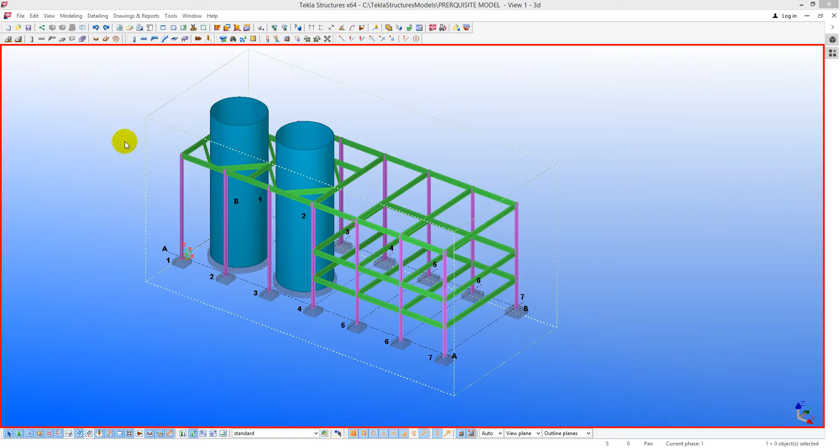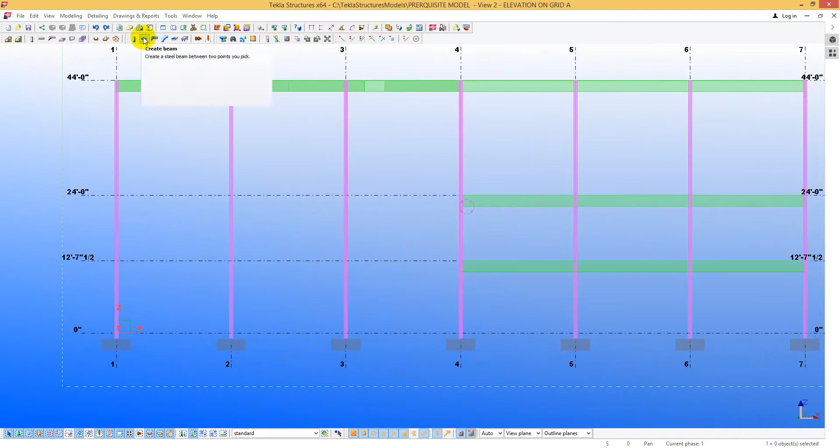In this video, I'm going to show you how to create the HSS bracing along grid line A. Well, to begin with, we need to have a view of grid line A opened, and so we will open this view here, and then we'll go and grab our beam tool, double click on that, and load the presets for HSS brace.

Okay, it is giving you a 4x4 by quarter-inch HSS. Of course, that can be changed by going into the profile catalog here and selecting an alternate size. You should also know the material grade when you're doing a real project. So let's just continue. We will hit apply, and then we can close the dialog box and begin creating.

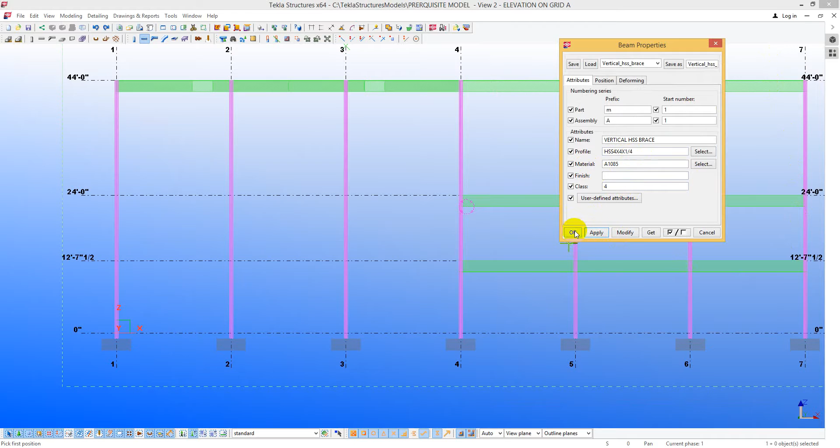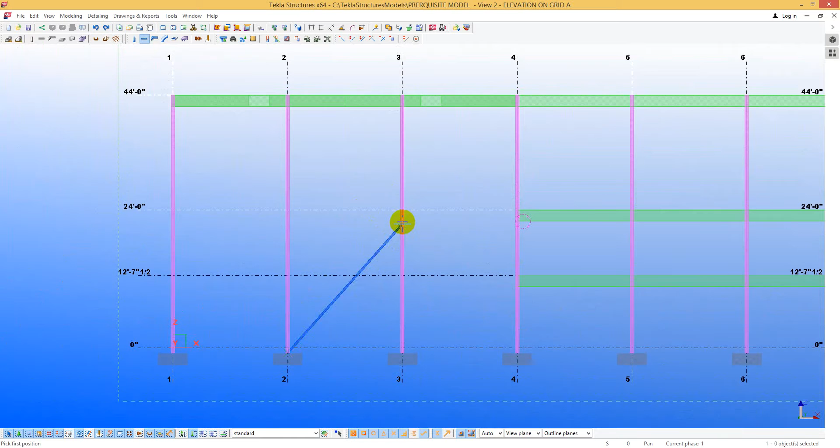Notice the plus sign on our cursor. We're going to go down and grab the bottom of this column right there, and we want to snap to the center point of this column right there. And then we want to click at the center point of the column again, which would be at the end of this piece here, and we would go to the top and click.

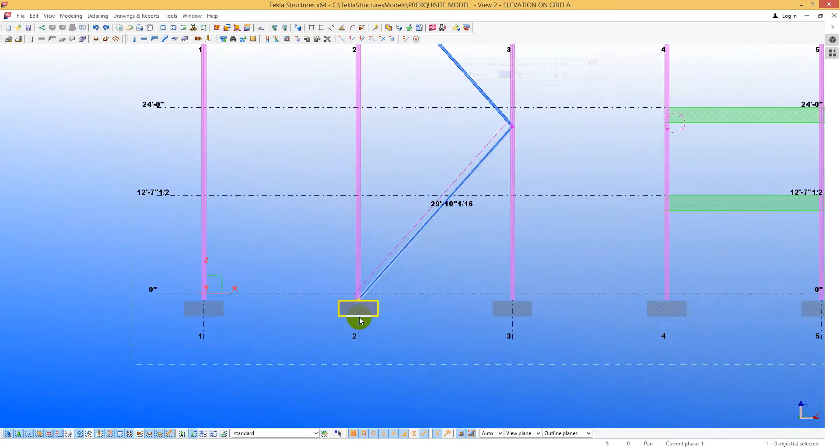Okay, the next step in the exercise is to lower the start points and end points, or raise them accordingly. You can click on the end point, and do not click on the whole member and raise it, because we will raise the entire member. We only want to raise the work point. So I'm going to click on that, and that becomes solid.

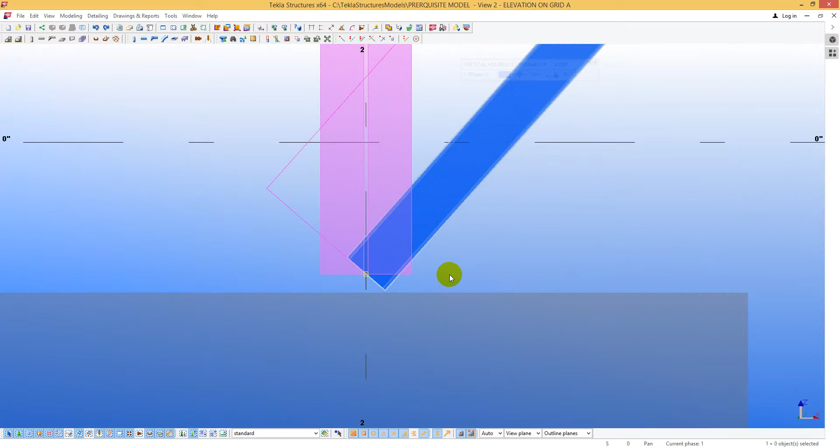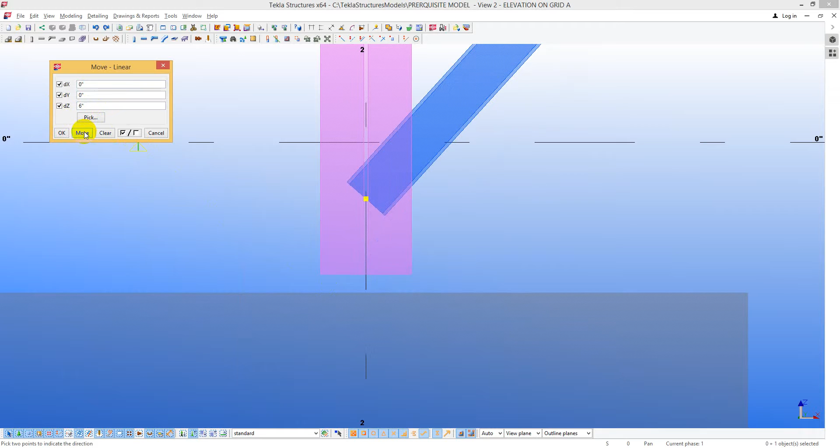Another way to make that solid, which is a good thing to know, is to hold your Alt key down, press Alt, and draw a box around, and release the mouse and the Alt key. Either way gets the handle isolated. We're going to right click, move special linear. We're going to move it 6 inches in the vertical, so type 6 inches in here and hit move, and you'll see it move. Right click interrupt.

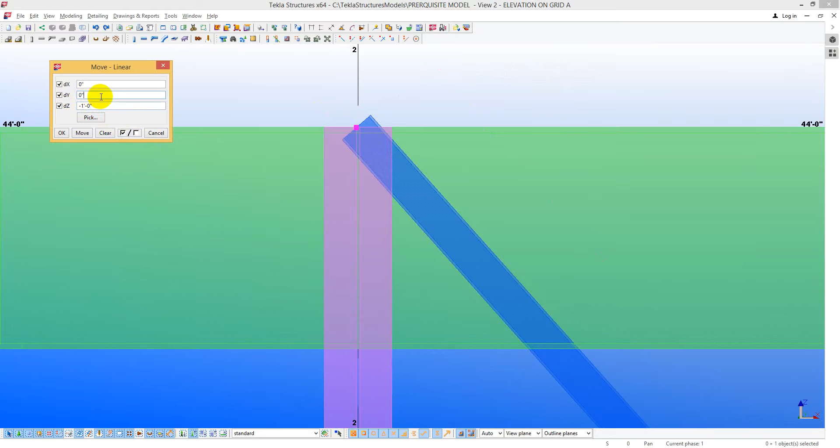And now we'll zoom out and go to the top and click on the member, press the Alt key, draw a box, and in this case we're going to drop it down minus 12 inches, which is a foot, and move. And there we have it.

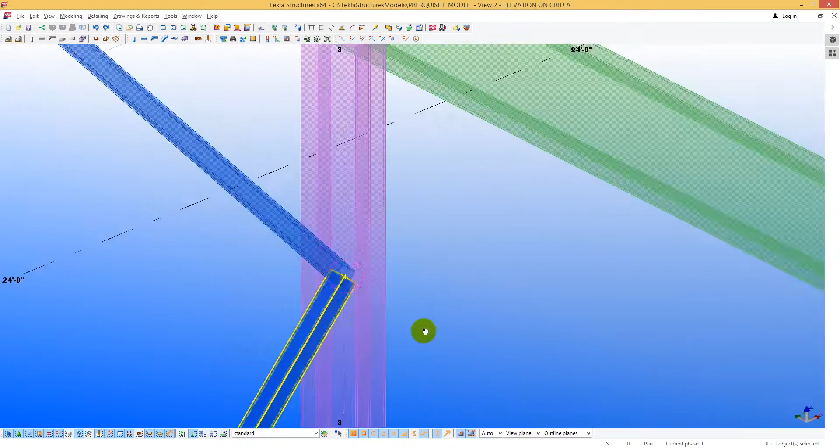One thing that you might want to check is to go here and press the letter V, click in that area there, and rotate it to just make sure that that's aligned in the center, like you see here, because sometimes if you do it incorrectly, it won't be aligned in the center.

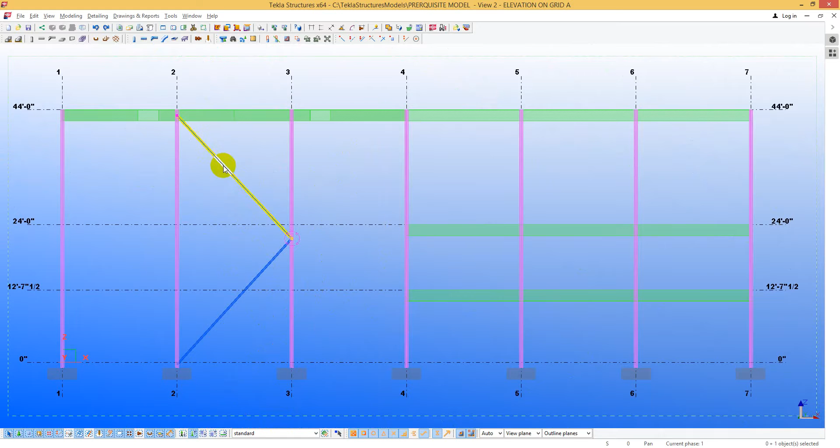Control P. Now what we're going to do is mirror copy these two members over into this bay. That's done by selecting the member, hold your Control key down to grab the other member, or you can just draw a box this way. Right click, copy special, and mirror. Okay, initially this will be 0. The only reason it's showing up is because I have already tested it. So you'll be starting off with 3 zeros here.

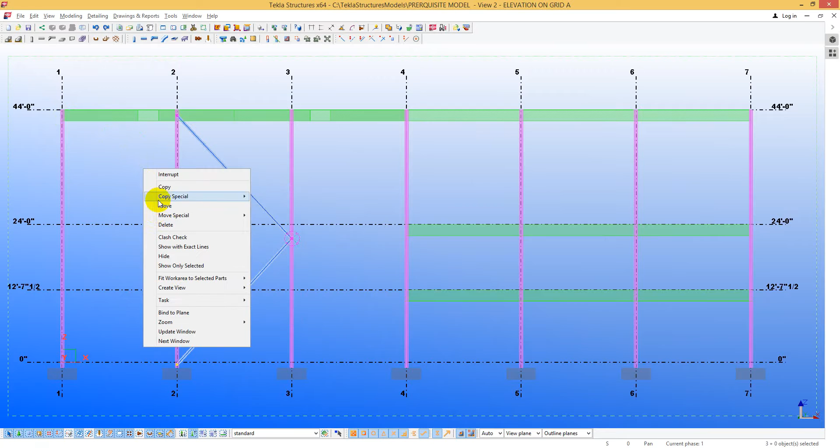So what you'll want to do, right click, copy special, mirror. You'll be wanting to select a mirror line. So you can pick any 2 points along this line. I'm just picking the 2 outermost points on the grid. Notice that it puts the 39'-4" as the distance from the 0,0,0 point, your origin. The angle is very important here, and in this case the angle has to be 90 degrees.

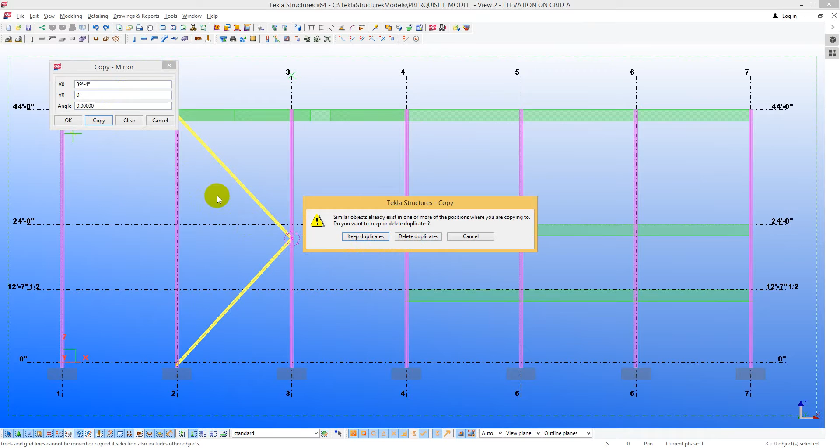If you put other values in here, let me just leave it at 0 and watch what happens when I go to copy. It wants to copy it back on top of itself, and so it's now asking you, do you want to keep duplicates or delete the duplicates? Obviously deleting the duplicates will just give you back what you already had, so we don't usually bother with that when we see that error message pop up.

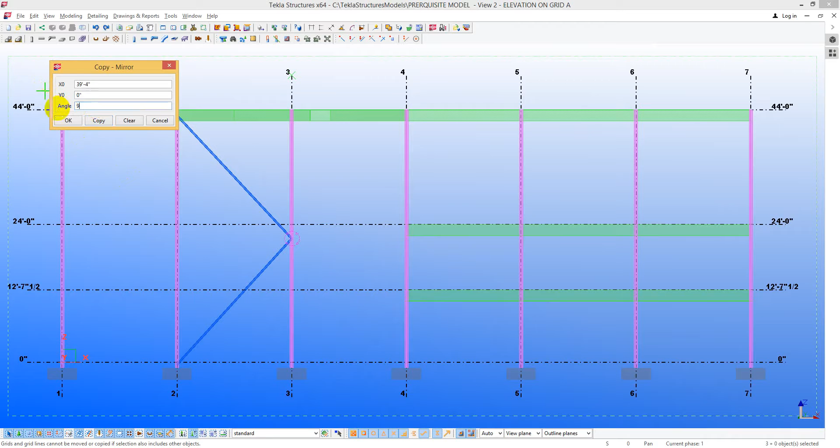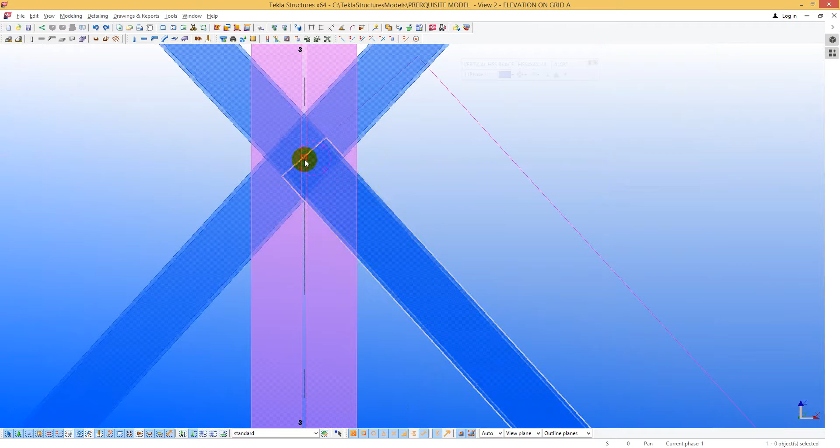So now we're going to put the 90 in here, and we'll hit copy, and now we have a mirror image of the bracing. And you can just double check again to make sure that all the points are aligned here. One thing you should also look for is that the end points all coincide. So if I hit this piece here, there's the end point. If I hit this piece here, the end point did not move. So you know that they're all aligned correctly. So that concludes this lesson on how to add the HSS bracing.